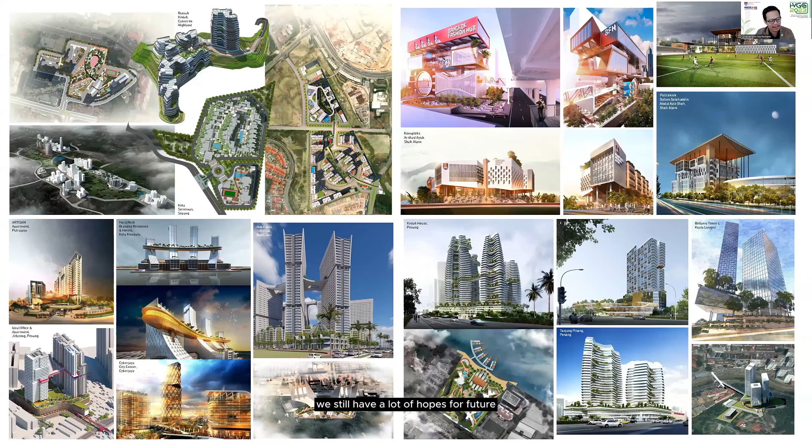My name is Kaurizmi Noisham. I run a few practices, and in our office we are a bunch of young designers with great idealism. We still have a lot of hopes for the future, and we did a lot of projects, diverse in scale and size, including developments and master plans. At the same time, we also design for the digital world, or the metaverse. We have other, more informal outputs as well, such as podcasts, and my TikTok account, for example, which is an advocacy channel for the public.

At the same time, we occasionally introduce our research pamphlets, what we call manifestos, and this is some of the series. Today, what we want to talk about is our adventure through our journey in architecture.

The idea was to have a good subsequent workflow of knowledge, from a think tank to architectural designer and practice, where the think tank would get into the gist of the broader vision of the world and refine it into a physical intervention by a visionary architect, an entity that is always in competitions. And if the project is eventually commissioned, it will go under practical architects' oversight, which looks at the refinement of things that have legal implications.

Now, for our first project today, we're going to share our winning entry for Penang Bay, which we won back in 2021, if I'm not mistaken.

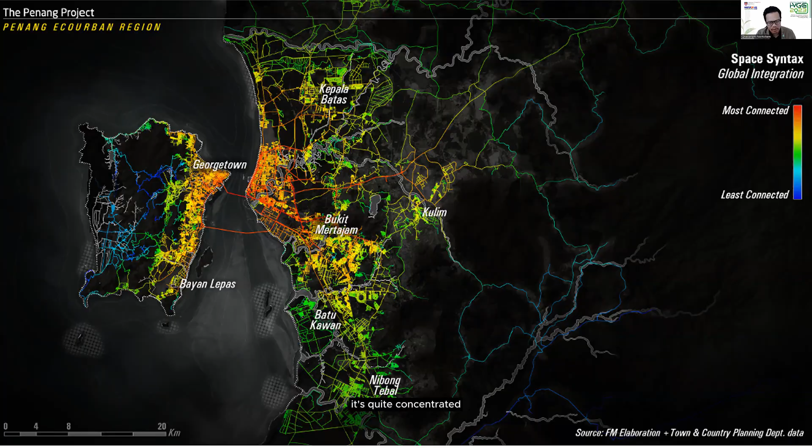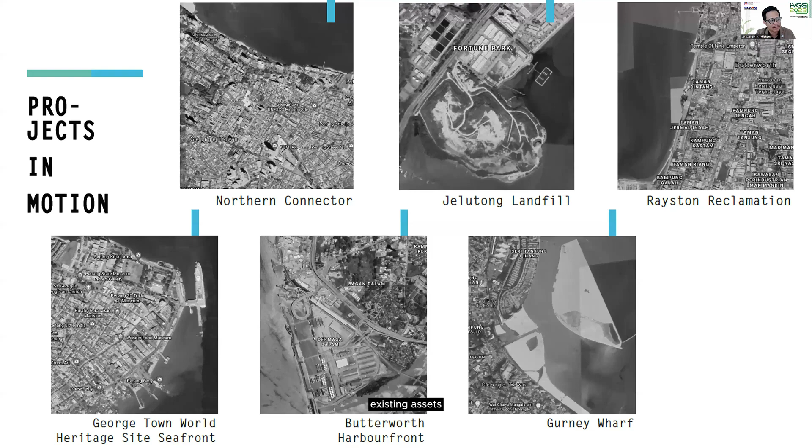This shows some of the ongoing efforts within the bay itself. You can see some of them here, and we're going to look at some of these as existing assets that we can work on within our proposal, redefining where the eventual intervention would be to create a new urban model for this particular region.

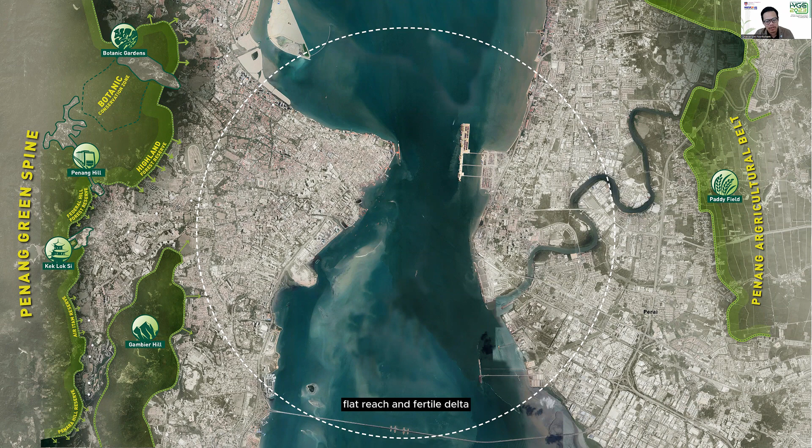We look at all the possibilities and start by framing the region. There are huge natural assets on both sides: the Penang Hill as part of the Penang Green Spine, with hills and highlands on the island side, and in contrast, a flat, rich and fertile delta in the agricultural belt where they harvest paddy. This shows some of the interventions or possible parcellations of strategic input that we want to inject into this region, but since we're short of time today, I won't cover every parcel.

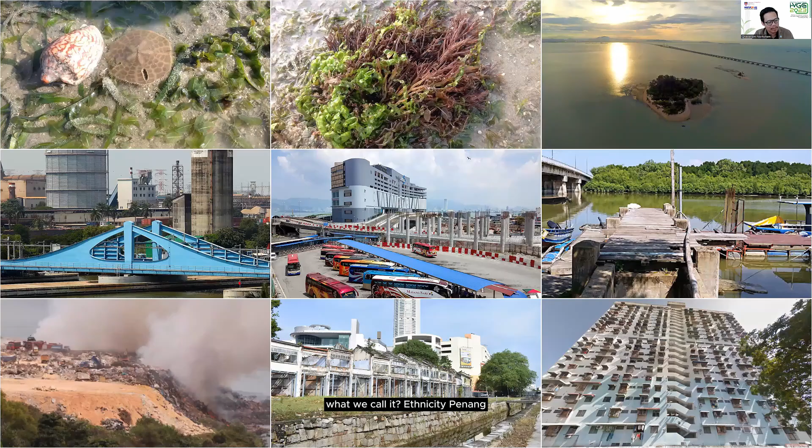This is a typical outlook of multi-ethnicity Penang, and it offers a range of experiences. But of course, this comes with the challenge of industrialization and now de-industrialization, and management of resources that includes habitats for local fauna, sea fauna, and man-made infrastructures such as social housing, industrial bridges, jetties, and other water assets.

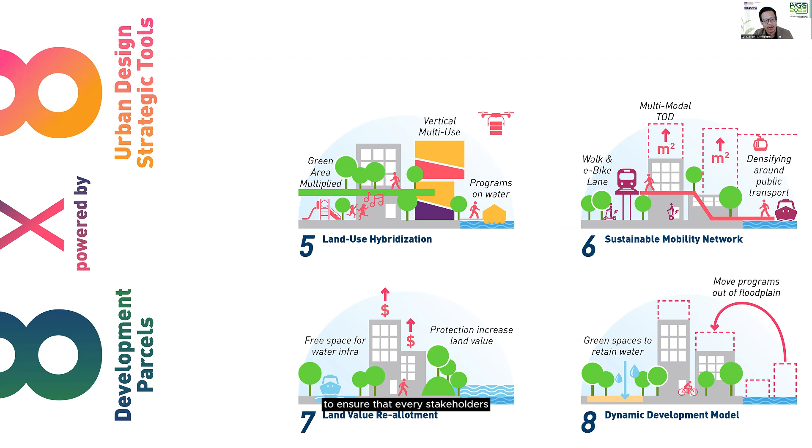To activate the 8 development parcels, we developed 8 urban design strategic tools that cover resiliency to make it climate-ready, ensuring social inclusion for everyone and empowerment, improving the bay's resiliency as a whole, ecological outlook, and legality ensuring versatility and flexibility in land use, sustainable mobility network, and the economic side: land value reallotment and a dynamic development model to ensure every stakeholder's economic concerns are fairly addressed in this upcoming proposal.

So these are the 8 development parcels that we think will give the most impact in this particular bay. We're going to deploy the strategic tools, but they're not to be deployed all at once. They can be deployed in combinations, depending on the particular parcel.

We deploy them according to the suitability and the goal of each individual parcel, to address the challenge of climate change that we are going to face in the near future, and alignment of these challenges to the aspiration of sustainable development goals.

To ensure we bring more people to the fray and be an inclusive urban conurbation, we have to ensure that marginalized communities that need a little bit more support—single mothers, orang kelainan upaya or people with disabilities, people with poor social support—are part of the master plan software, rather than thinking it could be done later. That includes social enterprise, empowering single mothers, or troubled teens with mentoring exercises.

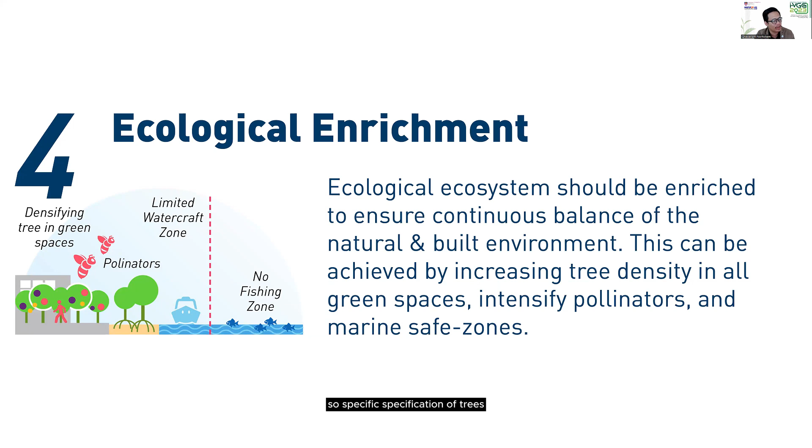So densification of trees, encouraging pollinators, and the designation of some no-fishing zones. This is an example where we can free up replanting of mangrove trees, bringing back the rich environment that this flora and fauna can thrive in.

And at the end of the day, it still serves us in a way that ensures our food security—first of all food quality is maintained, and food security is sustained.

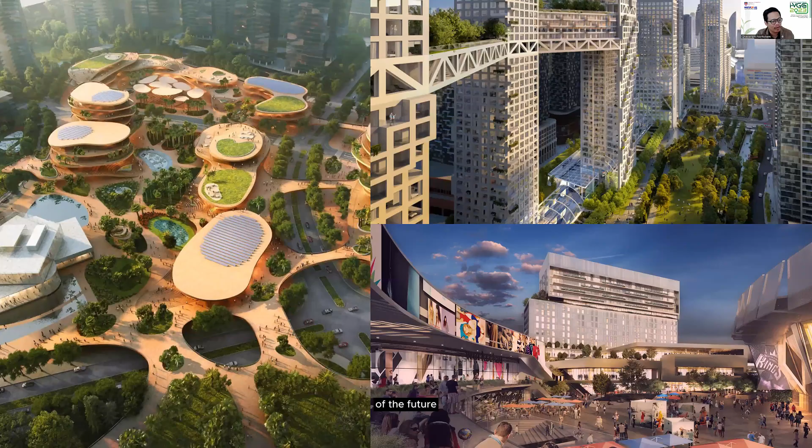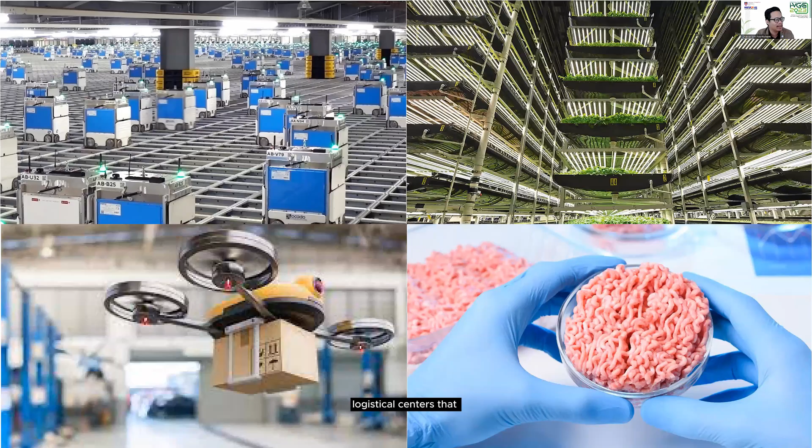With the adoption of better technologies of the future, we want to ensure they are included in this design. That includes the use of autonomous drone delivery and mechanized logistical centers that reduce human intervention, or rather reduce the intricate logistical challenges of getting food, parcels or mail to individual houses or premises.

And try to reduce the footprint of producing food, which might include producing meat in a cellular lab, or plant-based meat, and of course production of food in a contained and controlled environment.

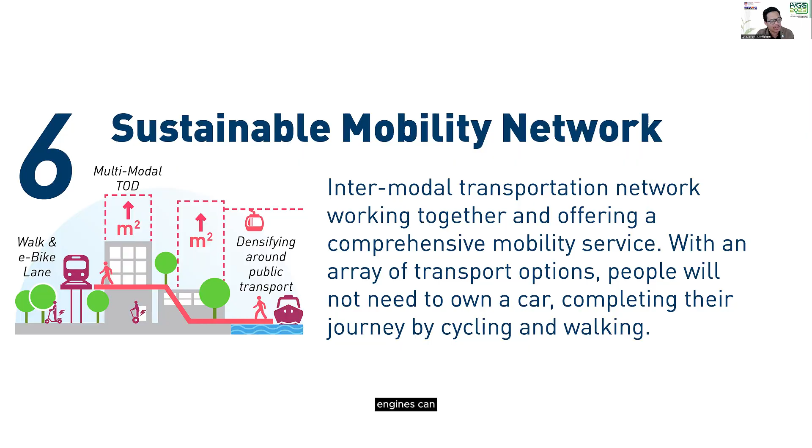To ensure all this goodness is paid for and possible, we have to ensure that people can move and economic engines can go on. Penang has earmarked some allocation under the Penang Transport Master Plan to include a cable car in the array of proposed

network of public transportation. But we still need to ensure that our PMD's—personal mobility devices—infrastructure, or micro mobility infrastructure, is also ready to complement the last mile gap.

When we do all this, there are some challenges—some areas that need to be reserved for these efforts, and the land value has to go somewhere. So this works hand in hand: land value reallotment and a dynamic development model has to have that flexibility to gauge the legal challenges of land ownership, and of course the value attached to the land.

To really demonstrate how that actually works in those parcels, we can see here in this particular case it's in the Macallum neighborhood, not far off from the Komtar Tower.

You can see right now it's being used as logistical piers for construction material, but they are slowly recovering some of the land to ensure it's slightly more habitable, redefining reclamations—I wouldn't say a total reclamation, but rather redefining the shoreline per se.

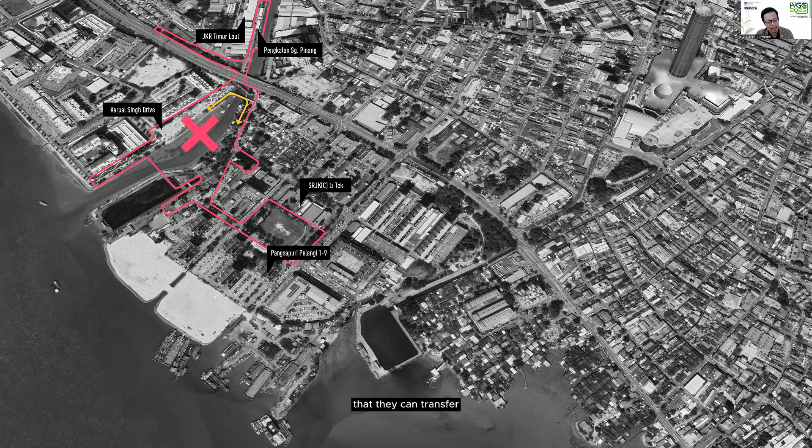So this is the main artery, which is the highway that has a lane reduction as it goes into the UNESCO gazetted site. What we want to do is ensure they have a loop or a transferred mobile mode from private vehicles. Then we want to introduce Initiative B1, for example a Macallum multimodal terminal that tries to bring people into a hub where they can transfer into other modes of transportation. That is one of the intentions.

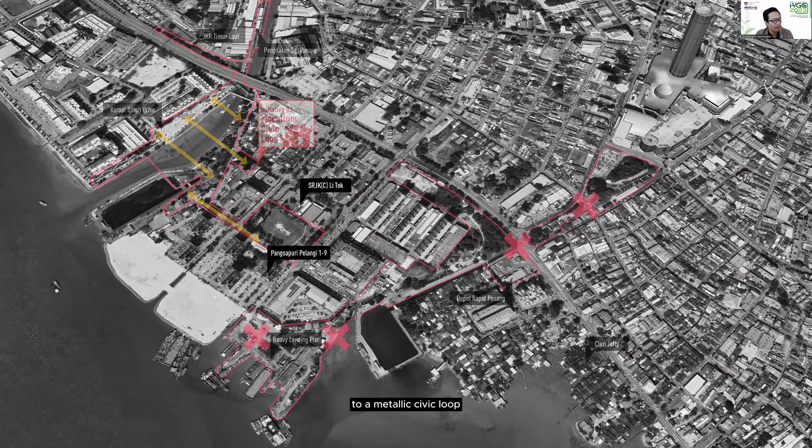The next one is really to reconnect this area where the newly developed neighborhood is on the other side. Right now there's no physical connection, so we try to tie it back through a Macallum Civic Loop. While it's near Komtar Tower, the neighborhood does not enjoy that proximity, and there are some urban fabrics that are not connected or poorly connected.

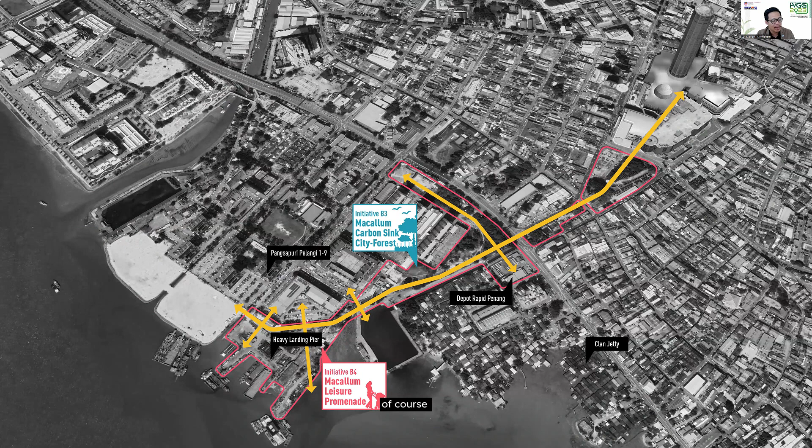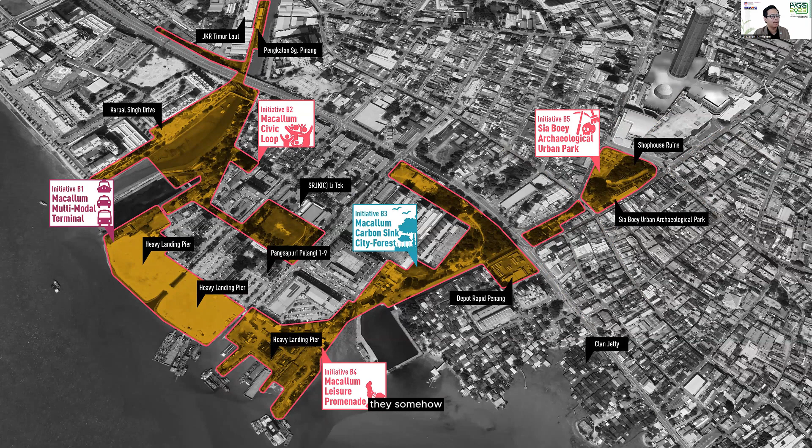We want to get them aligned and try to bring people from the iconic Komtar Tower, or the Komtar complex, into the waterfront, so that they can feel they are actually on an island. That will include a carbon sink forest, and at the end, at the tip of the shoreline, a leisure promenade. What we want to do eventually is create appreciation towards some of these interesting nodes, so that when you look at all five working together, they somehow sum up or redefine this particular neighborhood.

Starting from the first initiative of getting the multimodal terminal built: we want to get the ferry terminal and the bus terminal, currently clogging along the shoreline near the Clan jetties, repositioned here where they can have modern amenities, an integrated complex with other transportation modes such as water taxi, the possibility of air transport, and the existing ferry that goes overseas or to Butterworth.

So we can accommodate customs, police complexes, and enforcement bodies together in a complex, so the administrative portion becomes tighter. A bus depot is here as well, so it's all integrated. The idea was really to tap people in from the highway into the Macallum Pier Road.

Eventually we try to get everything out and decommission the existing ferry terminal, which can then be turned into a touristic asset, in line with the Clan jetty on the side. So the idea was really to take traffic out.

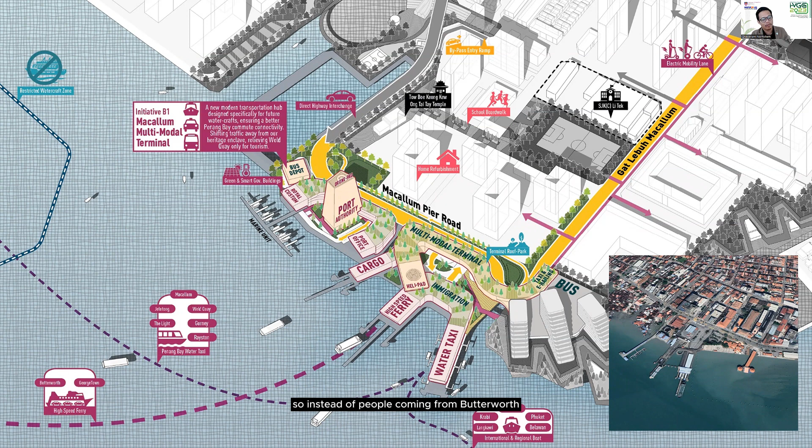So instead of people coming from Butterworth flooding the gazetted area, they are now at the tip or start of where the highway is. The highway is connected through a direct bypass that we name the Macallum By-Pass, which tries to tie the existing highway with the new transport hub.

In this particular area, we want to tie the neighborhood together with a social loop where people can go around and enjoy themselves near the waterfront, especially with development for youth and appreciation of civic qualities between the neighborhoods that are currently physically separated.

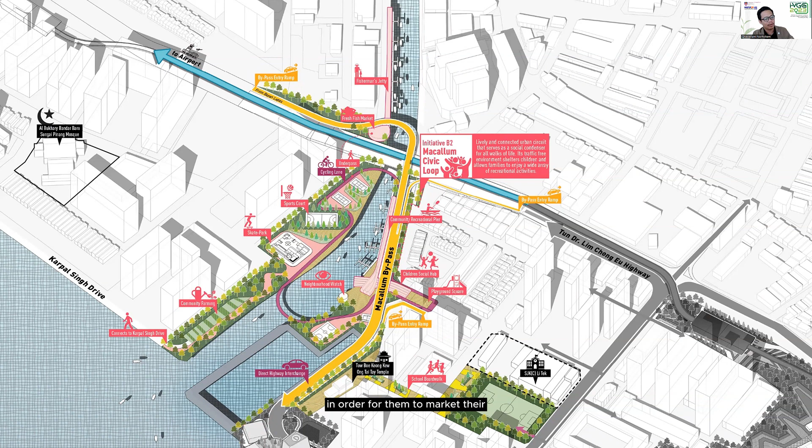Of course, we have the Fisherman's Jetty as one of the stakeholders that actually uses the water body, to substantiate or supplement their economic interests. A new fresh fish market is also built for them to market their catch.

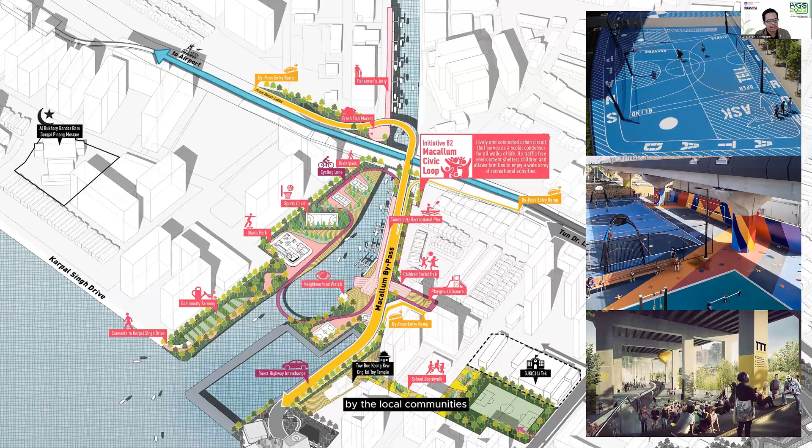So we are thinking along the line of weaponizing infrastructure. Of course, there will be the Macallum By-Pass, which is a form of private vehicular infrastructure. We understood that, but at the same time we also give a sheltered urban fabric for social engagement down below, activated by the local communities, and especially a space for youth to get into good habits, togetherness, and social development.

For most of the housing and social housing areas, we opted for facade upgrades. The idea was really to ensure the house has potential for capital appreciation with development of urban realm around them, along with an increase of floor area.

I think this is not particularly new. Previous Pritzker Prize winners have actually extended an existing Parisian block with an addition of 20% of square footage, allowing the building to have a new facade, a new lease of life, and at the same time be more practical due to the increase of space.

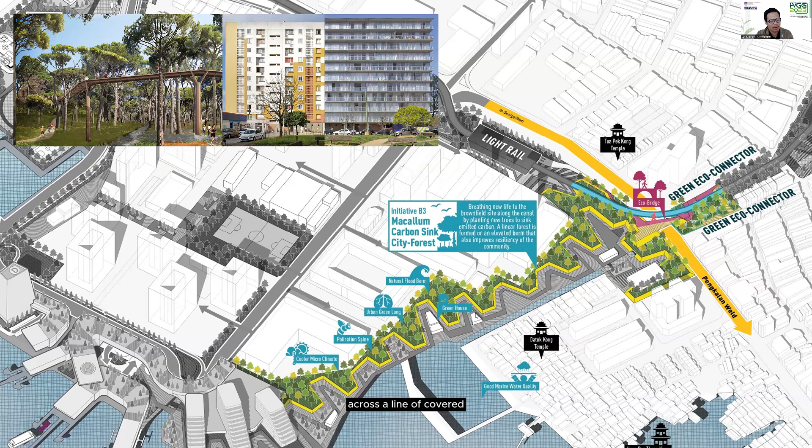At the same time, of course, a line of carbon sink trees will line the promenades that actually connect the main road to the water body.

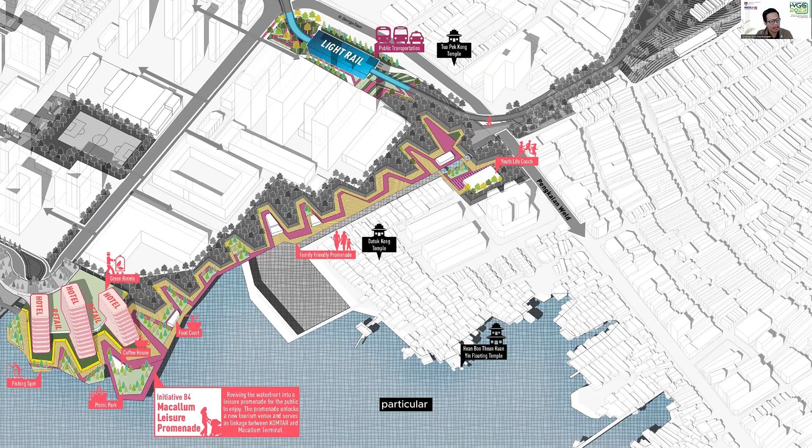With the advent of the light rail station, I think this area could be easily activated. The neighborhood that's been deemed as a back portion of the island can now have a front face as well. This new urban realm near the water can complement the experience that visitors or tourists get out of the clan jetties.

Of course, this is not really historical per se, but the idea was to create a balance between the experience, or rather the diversity of experience, that you can get going through the water body.

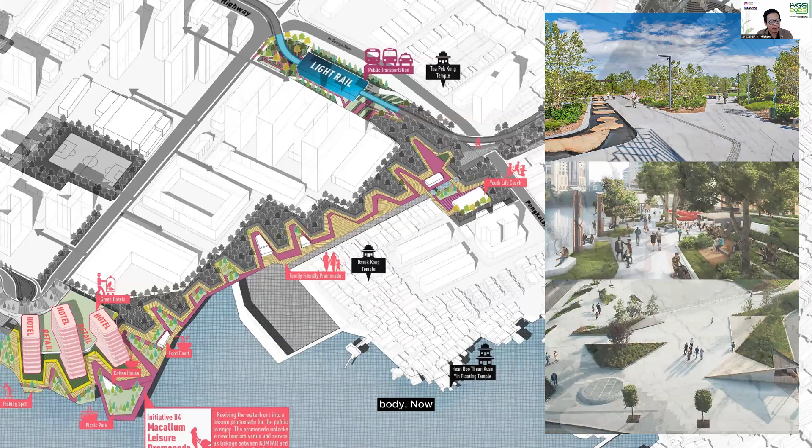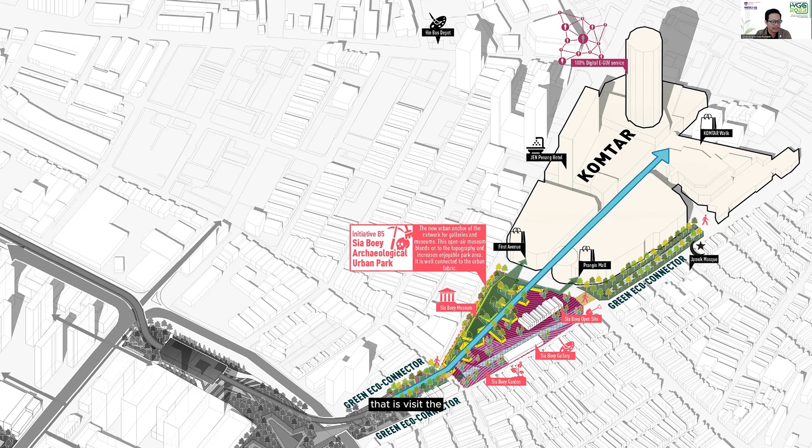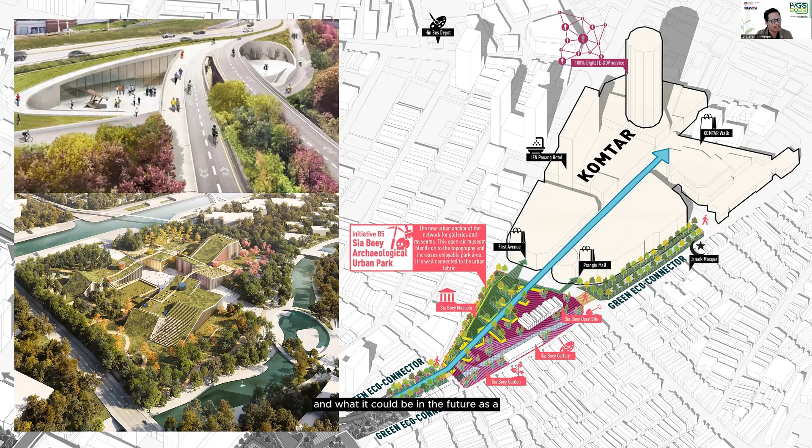Now, there is already a development for Sia Boey Archaeological Urban Park, and some revitalization works done here. But to ensure they hold substantial content, or commitment of time from people who visit the site, we propose a museum built from the ground up, bringing people down for an archaeological journey throughout the UNESCO gazetted region of the island, to discover what it used to be and what it could be in the future as a moment of inspiration.

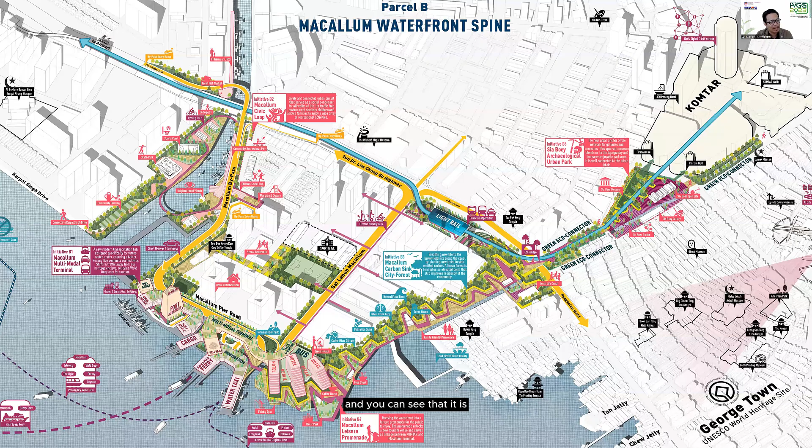So now this is the Macallum waterfront spine, one of the 8 parcels, and you can see it is quite substantial there in the middle, where it stands between parcel A, the heritage-centric seafront, and a bit more innovative Jelutong Innovation Campus, which we're going to cover in this lecture as well.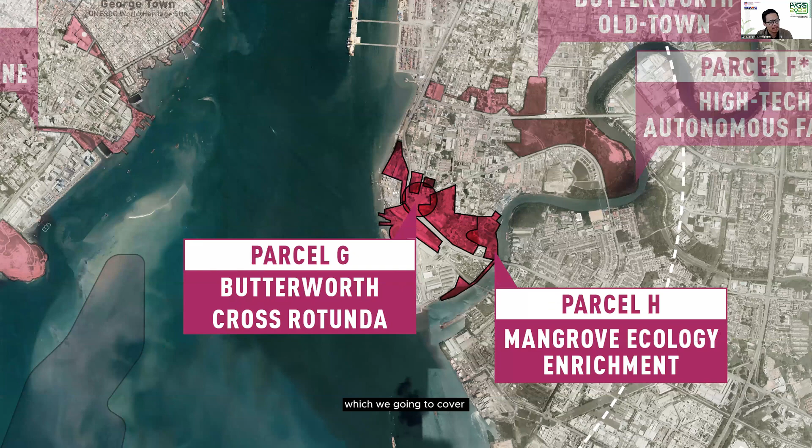So now, if we look at the other side, which is fairly challenging, it's predominantly infrastructural base, where you can see logistical port infrastructure with a lot of transportation lines, such as the BORR, the Butterworth Outer Ring Road, an expressway that cuts through.

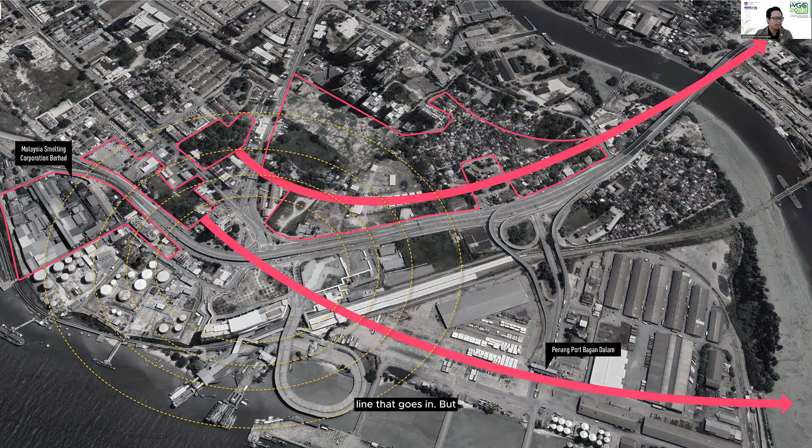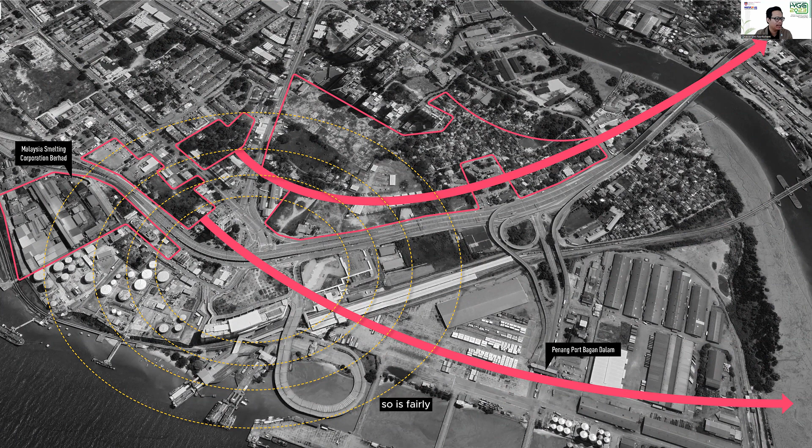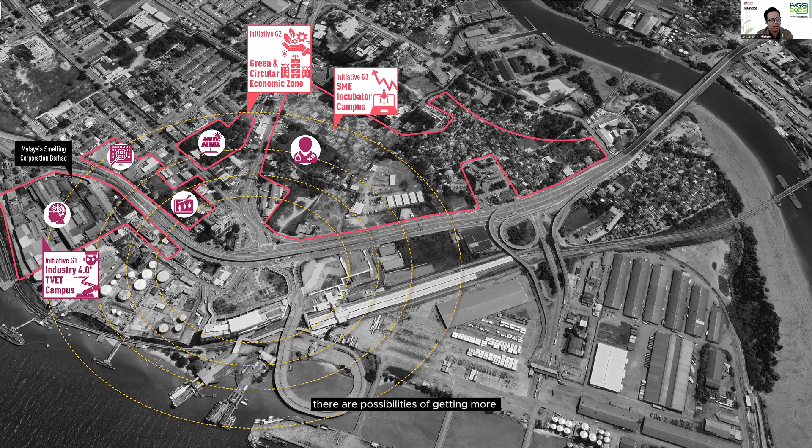At the same time, we have the large Penang Sentral, where the ferry terminal used to be, and we also have the KTM station there, the Kereta Api Tanah Melayu line that goes in. But when you stamp all this infrastructure, you can see the land development parcels are fairly fragmented, cut through by large roads, some more than 6 lanes. So it's fairly challenging.

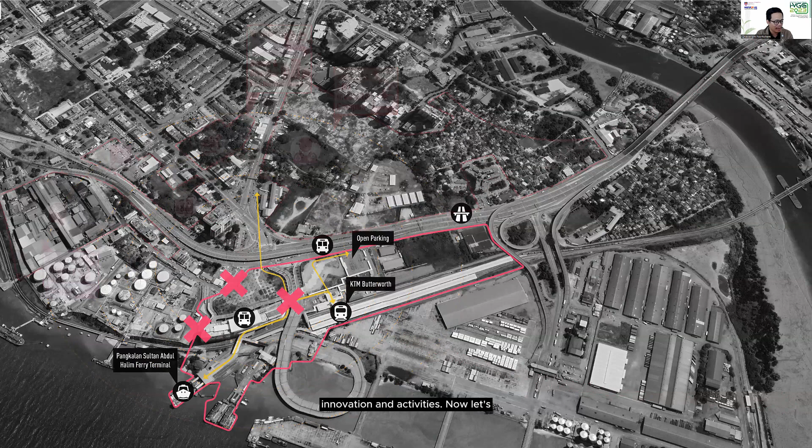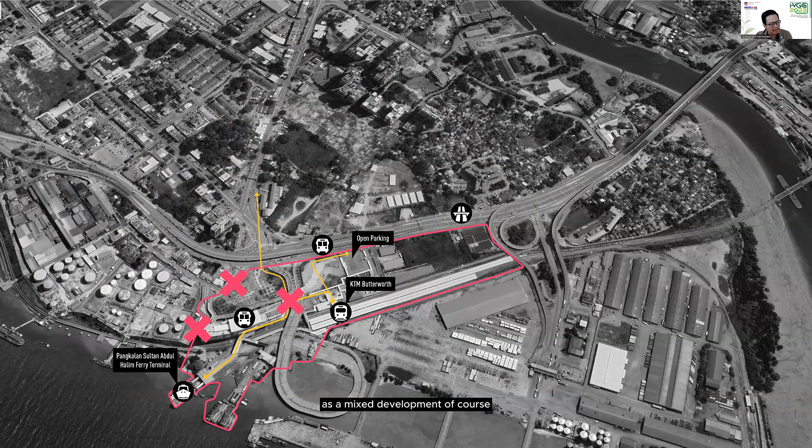Penang Sentral is slated to be developed as a mixed development. Of course, right now we only see the transportation hub, which is quite challenging due to the fact that it's not well connected to anything. It is an island by itself.

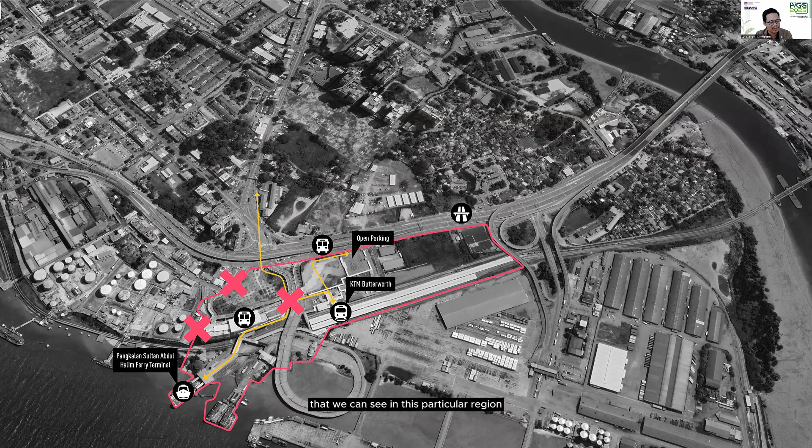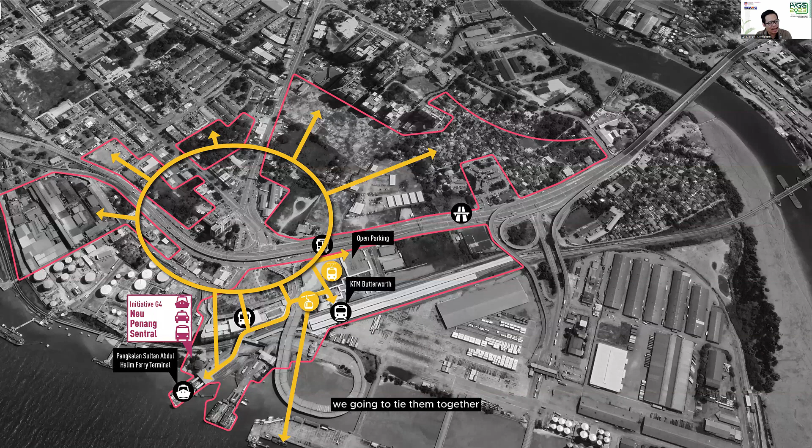So this is some of the challenges we can see in this region. Definitely what we want to do is ensure all these fragmented fabrics are tied together tightly, and with the advent of the future cable car or skycab facilities or transport network, we're going to tie them together.

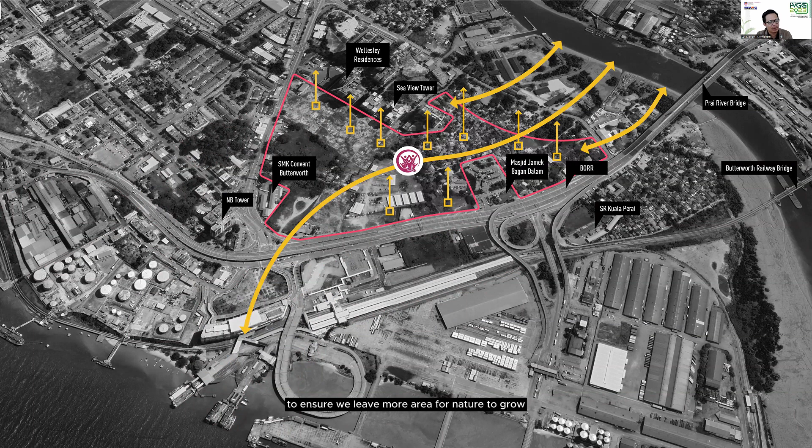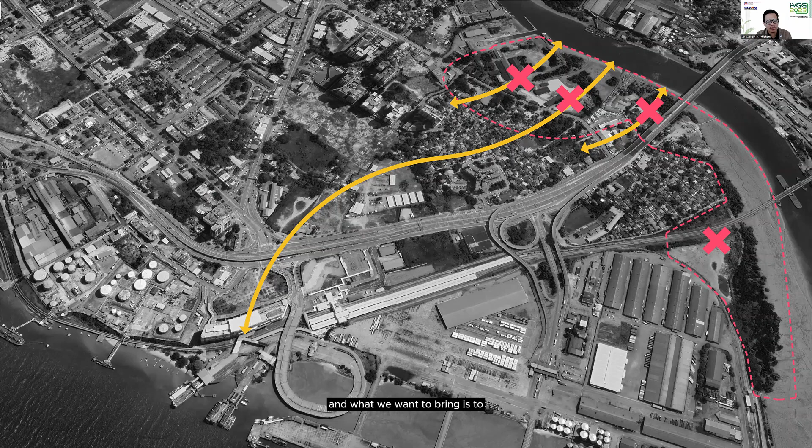So we want to ensure this particular area, which predominantly consists of smaller dwelling units, should be optimized and densified to leave more area for nature to grow in this region. And what we want to bring is clean water back to the community, so the relationship between human and nature will be enforced.

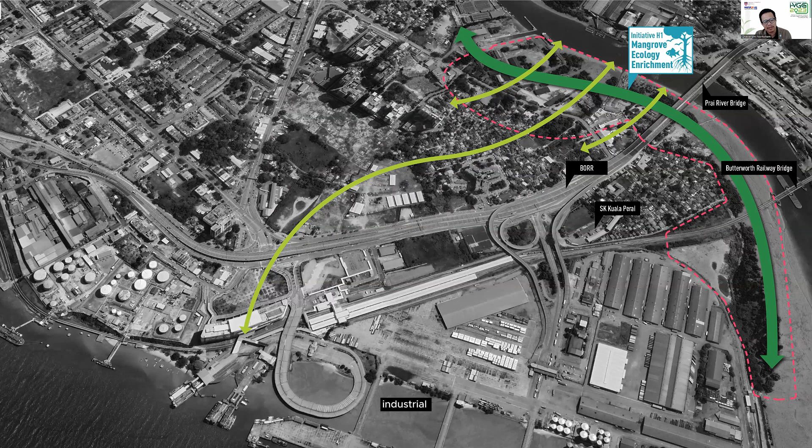So this is where we're going to do the mangrove ecological enrichment. The idea was really to ensure that all this derelict industrial infrastructure that is no longer performing is returned as natural sites. So as a whole, the interventions cover these particular pockets of areas.

Now, what we want to do is really to bring in connectivity and access to possibilities or opportunities of work and social mobility, at the same time recreational and ecological prowess that wetland could offer.

So it's like a best of both worlds, trying to allow you to go around with this transport hub, opportunities in terms of getting yourself educated or getting employment, at the same time be quite close to natural settings. So the first part is mainly trying to tie back both sides of the equation.

Of course, we need businesses that work within the realm of green energy. And if you look at the direction where the nation is going, more federal investment, federal grants or allocations, and legal infrastructure will be spent on energy efficiency, electrical vehicles, and the eventual new economic model. That also aligns with the new industrial master plan.

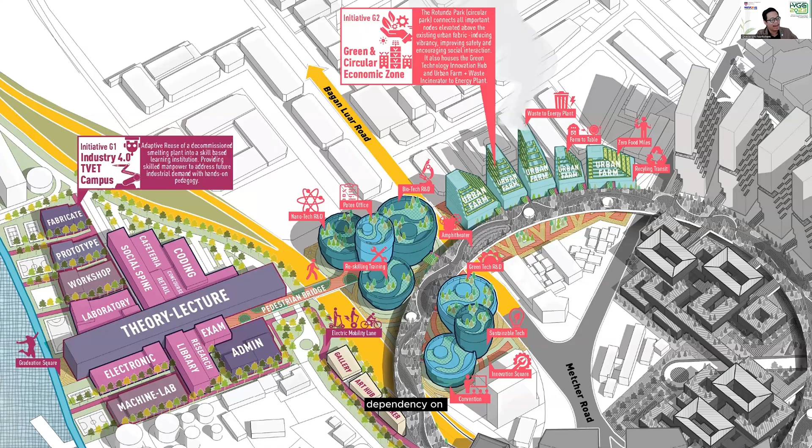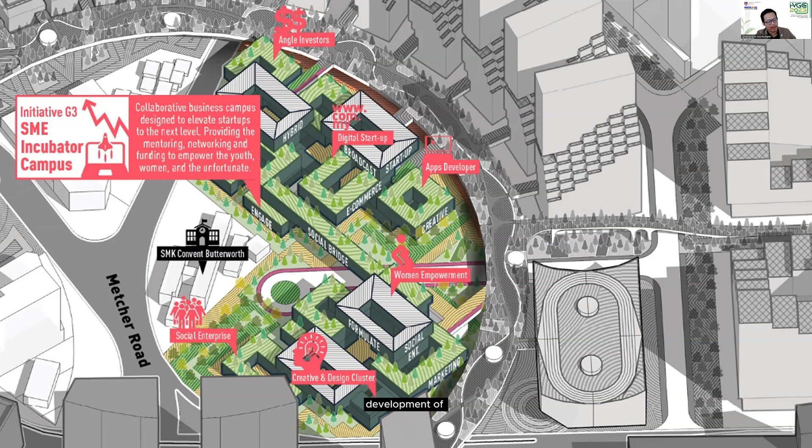Meanwhile, nearby this existing secondary school, Convent Butterworth, we want to develop a more socially conscious enterprise, trying to connect capital with people working to empower women, empower impoverished or underserved people through social enterprise, and youth with good ideas developing new startups, eventually getting to one local unicorn if we could.

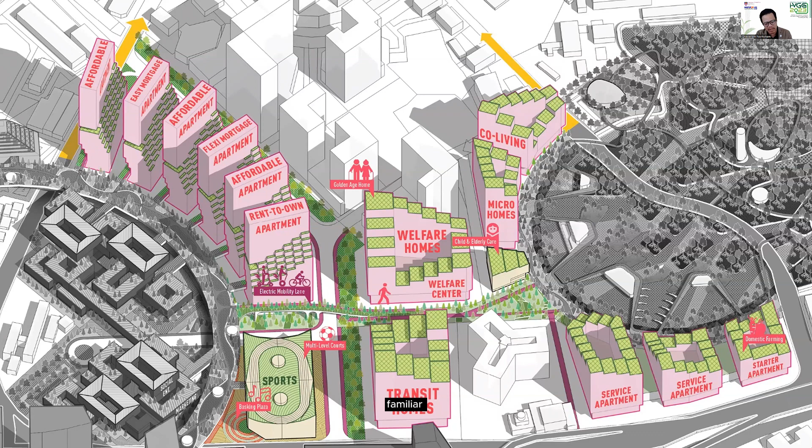To support all those domestic needs for dwellings, there are multi-model dwelling unit types that somehow allow people to attune themselves to a particular mortgage or lease model they are familiar with or suitable for. There is an array of residential models that can fit their mortgage and leasing preferences.

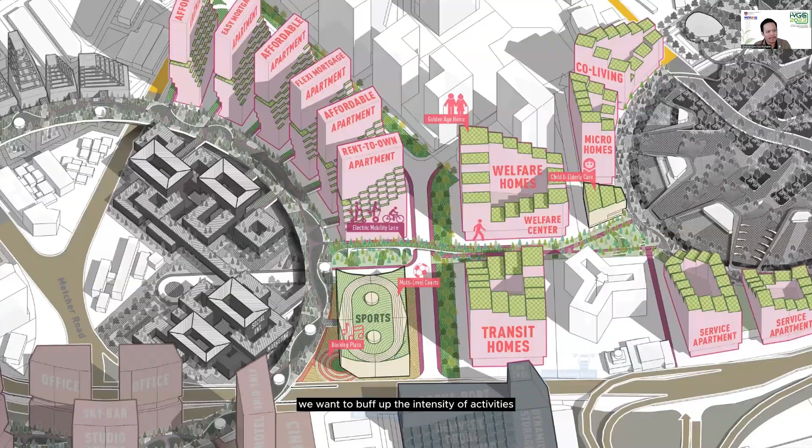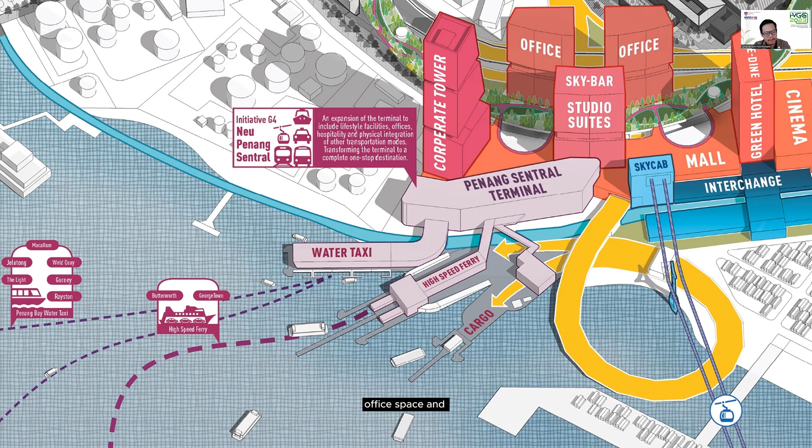And we want to buff up the intensity of activities nearby Penang Sentral, the idea of having the transportation hub linking to the future SkyCab and KTM station will ensure there is density and a need for larger office space and other supporting programs.

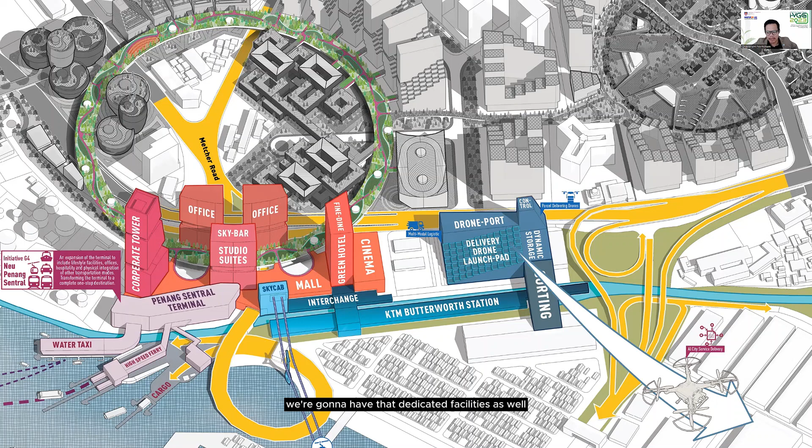All these will be interconnected by a rotunda, a park circling around, trying to tie back all the small fragmented parcels into one coherent urban fabric. And the idea of advancing logistical deliveries through autonomous drones means we're going to have dedicated facilities as part of the new and renewed master plan proposal.

On the other side of the Perai River waterfront, what we want to do is really bring back nature into the ever-growing modern city of Butterworth. The idea was really to encourage mangrove forests.

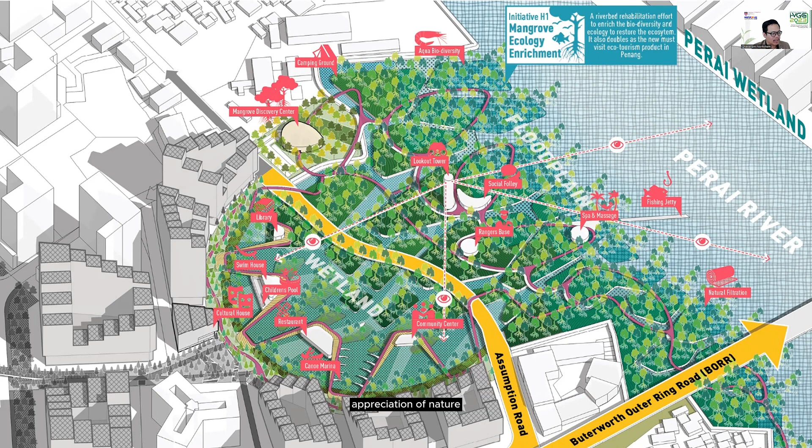And while mangrove forest has always been seen or deemed as unusable, we're going to have this floating platform that connects multiple programs all across the jungle or mangrove forest. The idea was really to bring people back to appreciation of nature and ensure that biodiversity and floral diversity are kept in this particular region.

So an overall master plan with the Butterworth Cross Rotunda will create a cohesive master plan that encourages people to advance themselves, get themselves mobile, climb the economic ladder, and of course be socially inclusive.

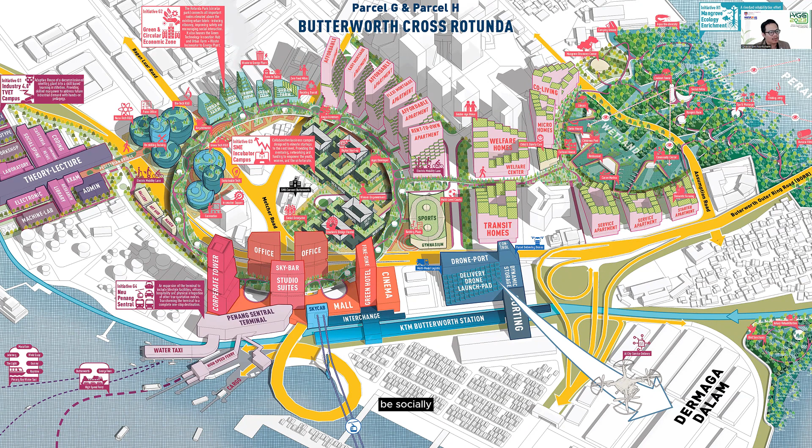Now, as we go up north along the Perai River, we can see there is a large development gazetted that is somehow dedicated to food production or modern food production, with the idea of getting lower carbon food miles, bringing food production into the city center.

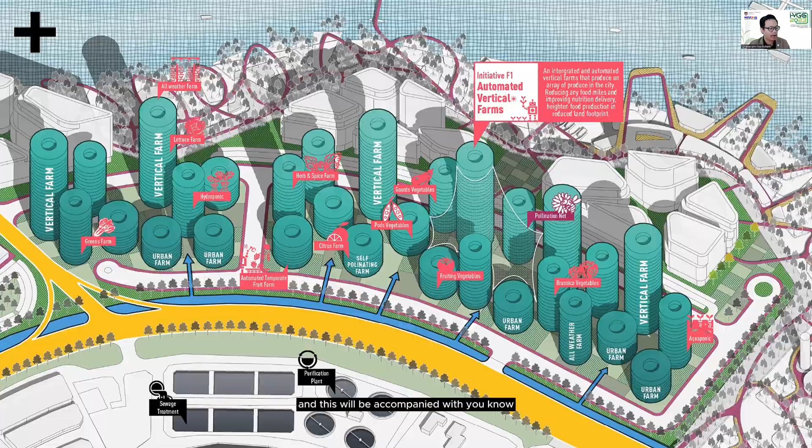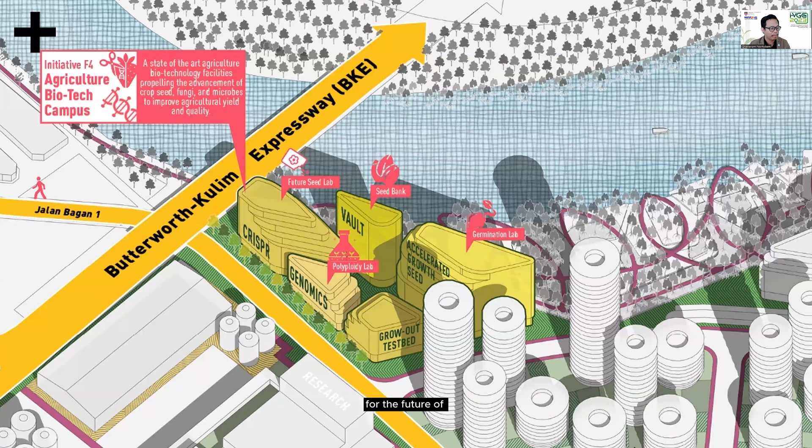And this will be accompanied with what Penang is known for, which is all these culinary delights and delicacies, and continuous research and development for the future of our food production and food security.

And I think we are at the juncture where alternative food products, or what we call manufactured food, or food alternatives, especially with regards to proteins, we can somehow develop a zone dedicated to that particular activity as a means of industrialization.

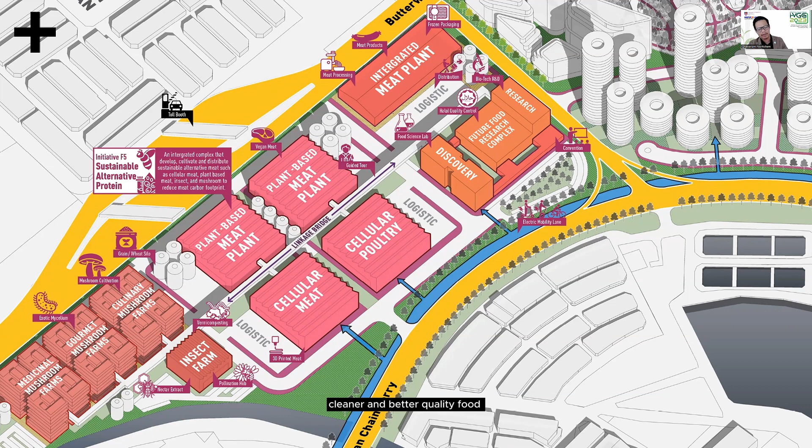Clean industry, there is one, and on top of that, cleaner and better quality food made accessible to all walks of life. The idea of sustainable food is also extended to the catch or the fisheries in the water body of Penang Bay.

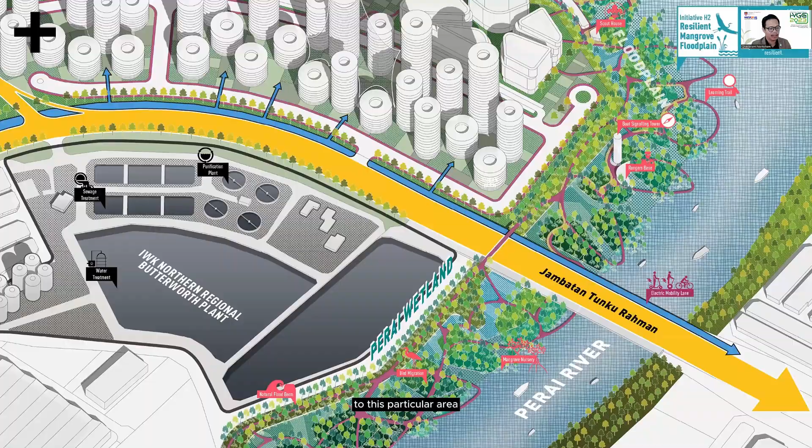Now, the continuous outlay of mangrove forests trajects up until this particular area, along with the programs. This will create a reactivated waterfront, giving us a larger or better appreciation while protecting the ecology, diversity, and resiliency against incoming excessive water during monsoon time.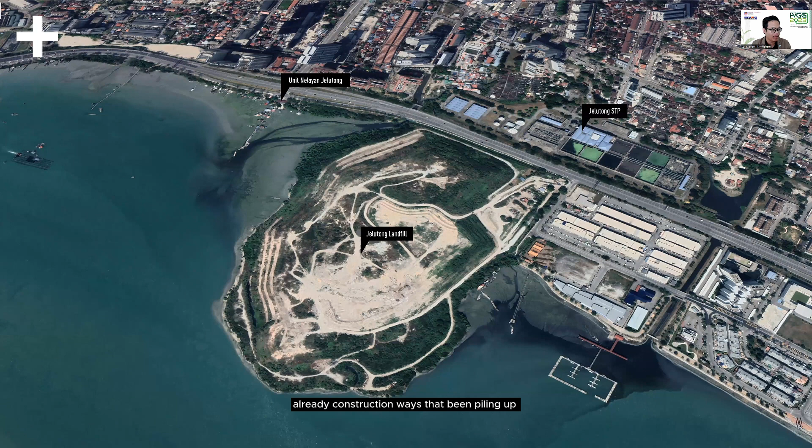Now we're going to go back to the island. In this particular area, called Jelutong landfill, it's an artificial peninsula made of construction debris, or construction waste, that have been piling up over the years, creating this huge mountainous crumble of rocks.

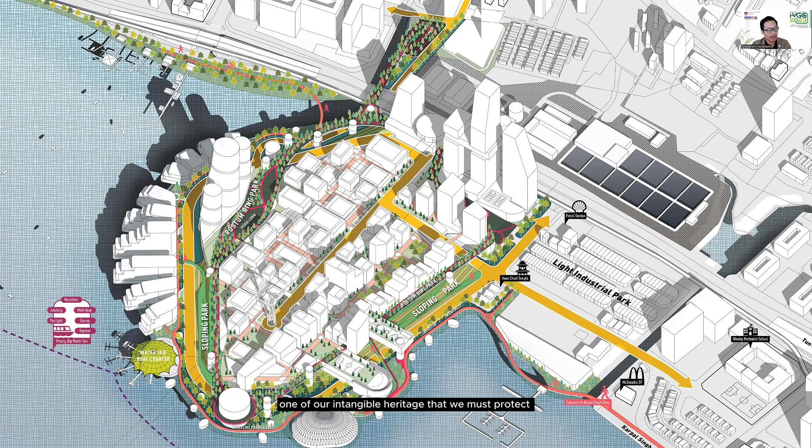So what we want to do here, because of the proximity to USM, University of Science Malaysia, is make this where all the core creative and high-technological activities are done. Penang also has this diverse cultural heritage, which is one of our intangible heritage that we must protect.

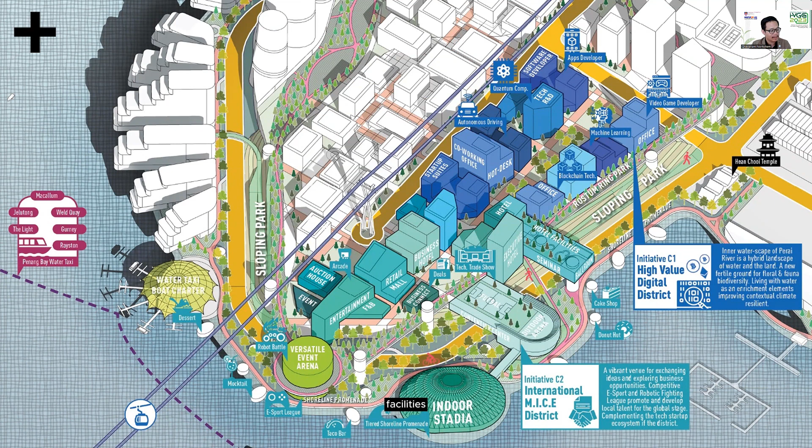On this side, all the SMEs and new innovation will be marketed, developed, and exchanged, with an array of conference facilities, event arenas, and spaces for entities to work from.

And to encourage, as one of the other sides of the coin, empowering global cultural production that somehow can be a new export, or an existing export but on steroids, with regards to the global reach around the world.

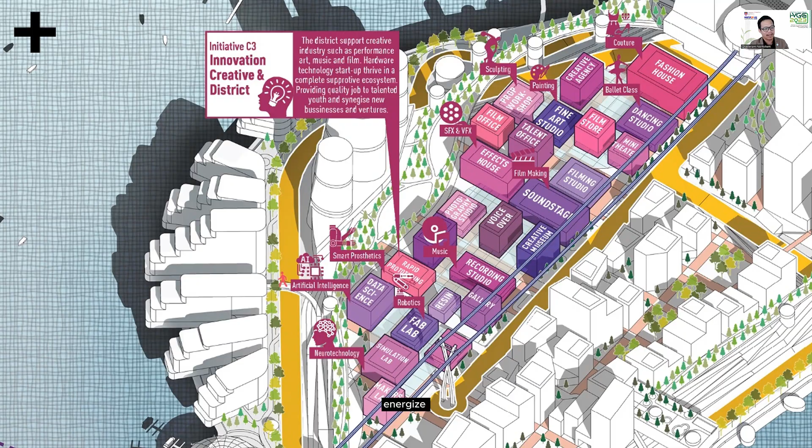So what we want to do is provide a multimodal, multidisciplinary district focusing on arts and those intersections and collaboration between disciplines, hopefully organically energizing the whole creative community to support those activities.

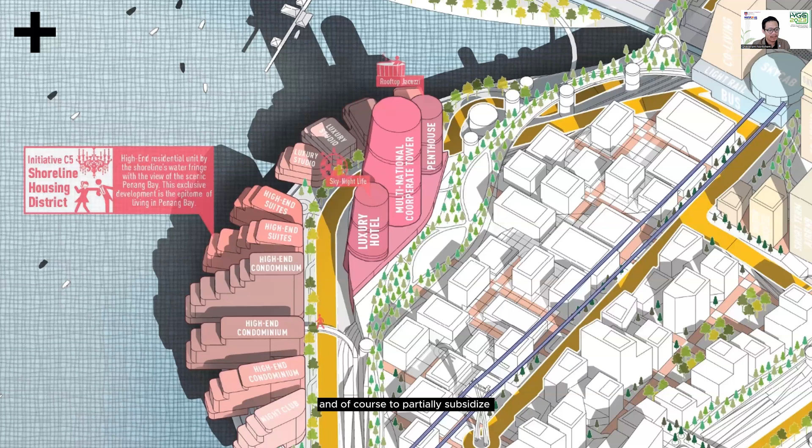There will be some development of dwellings, again multimodal, dependent on the market and target user, partially subsidizing the development. There will be luxury waterfront properties as well, where all these economic elements cross-subsidize each other.

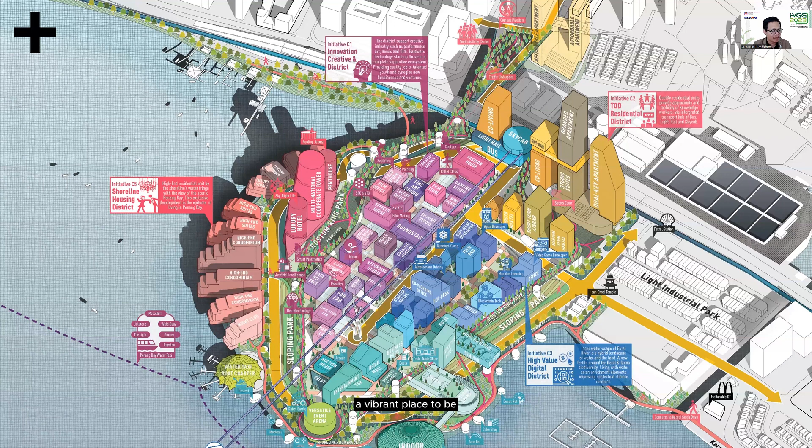So in total, it's a new, vibrant place to be, where arts and young minds come together with the idea of preparing a global product coming from Penang, repositioning what used to be a bunch of construction debris into an energetic master plan.

Of course, this is also where the Skycab on the other side from Penang Central will land, integrated with light rail and bus services on the island. This particular region will be the hotbed of innovation and youth empowerment.

Of course, we want to propel a new generation that has a lot of creativity and a lot of opportunities to express themselves and build businesses out of that interest and expertise.

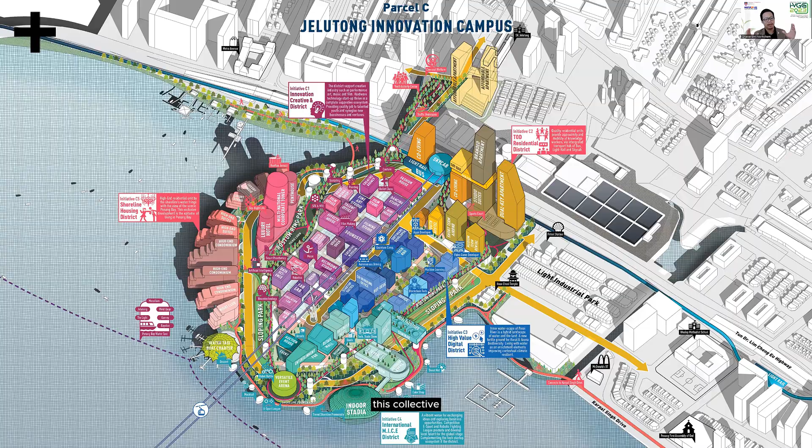At the end of the day, these collective individual developments try to bring about holistic and self-sustaining regions, where some are slightly inclined to improvement of ecology and resiliency, while others provide job opportunities and new innovation platforms. All in all, this is good practice to rework our existing urban fabrics and get the best out of them, regardless of the complexity and challenges on site.

And this is a true testament of Malaysia, what Malaysia should be: a cultural hotbed with rich heritage, but at the same time at the center of innovations and high-tech endeavors. With that, I thank you.

I hope, even though I did not cover the principle of what the future city should be, there are lessons to be learned from the demonstrations, about how we approach our project from a holistic point of view. Not really just talking about the physicality of the urban fabric, or the built environment per se, but the effect it has on the possible programs and economic models that come with it.

Economic models are really just a means of transaction that allow us to enjoy dwellings or access to good public space. And what we want to do is protect the interests of everyone, to make sure that we come out fair and equitable to everyone, to support the endeavor, or to support the initiatives.